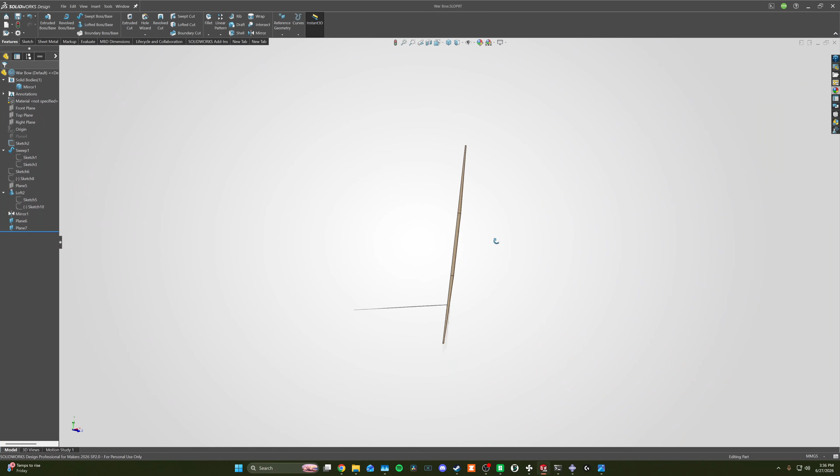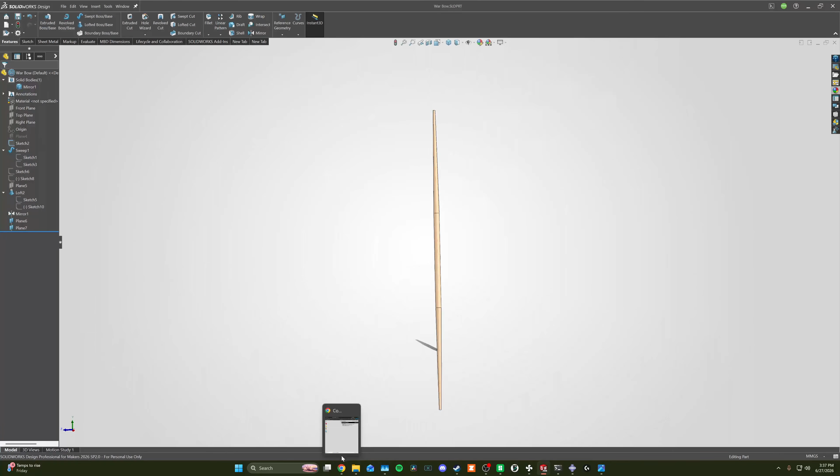I had a report on the English Warbow, which I have modeled up here in SolidWorks. We will now take this from SolidWorks to Abaqus. The way we go about that is by exporting and saving it as a step file, saving it to some area you know where it is, and hitting export.

I will show you how to do this on the school computers over the internet. This is the website for the school computers. If you go into the enhanced computer, you will have that. Send that step file to yourself and we will begin. On the school computer, you will want to have downloaded your step file, and you can now just hit start and open Abaqus.

Once Abaqus has started, you will select standard explicit model, and then import it, which you do through file, import, parts, and change the file type to step, and here it is. We'll import it just like that. Sometimes it'll come up with an error that says there's some highlighted imprecise geometry. Just ignore that for now.

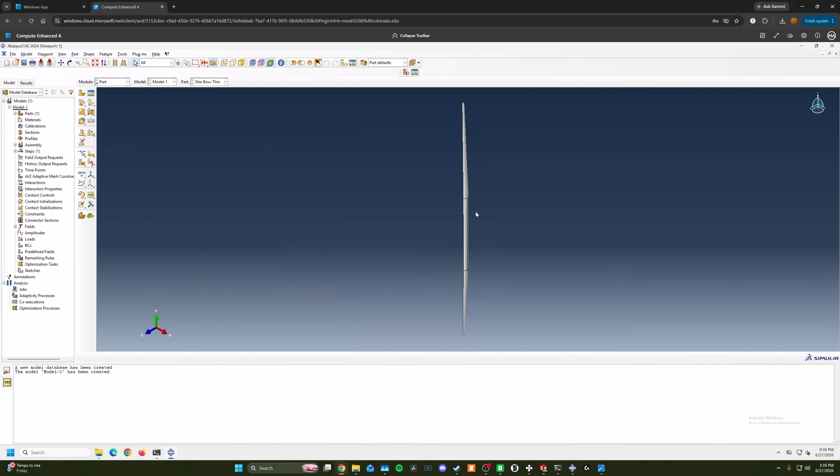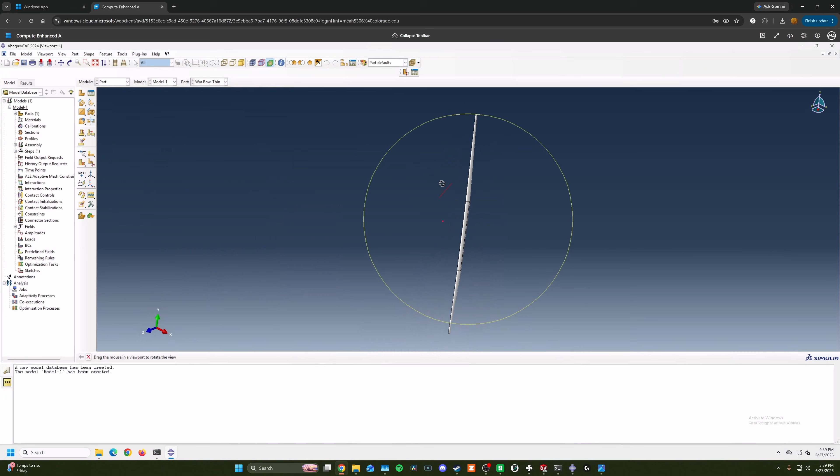We're going to be doing a static deflection model on this bow, so every bow will need its string. If you see here that you can't maneuver everything as you would in SolidWorks, what you can do is go to Tools, Options, View Manipulation, and move it to SolidWorks. Hit OK. Now we can maneuver it with the center scroll wheel. But this is good, we have our Warbow.

Next we'll need to make a string. We'll call this string. It'll be a 3D wire planar. It's going to need a large amount of space, so we're going to change that to 2000. We're going to have this here. I'm going to just model up the string as I did in my project, and I will show you that in just a second after it's done.

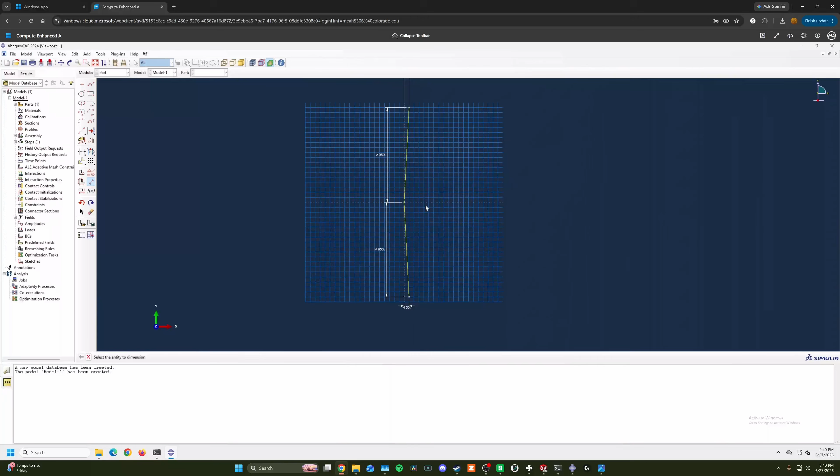Here we are. I have modeled up the string just like I did previously. It is currently 1900 millimeters long. It has a slight bow right here to make it accurate to how a real bowstring will have a slight divot in the center. After that, we can just hit done. And here we are, here we have our string.

Now we need to assign properties to it. To assign a property, you'll hit create, hit material. The name for the wood is called yew, I'm just going to type in English wood. Then we're going to need some information about its elasticity, so go under mechanical, elastic. Young's modulus is going to be 15,700. Poisson's ratio, 0.3.

Create the same thing for the string. We're just going to go under mechanical elastic here. I think the string was also 15,000, 0.3. Great, so now we have the string and the wood material.

Now we have to assign a section, so we can just hit section here. For the bow, we're going to want a solid homogeneous section because it is a 3D model. So we're going to call this Warbow section. Hit continue. For the material, we're going to select that to be the wood material we have. We don't need to assign any plane thickness because it is a 3D shape, not 2D.

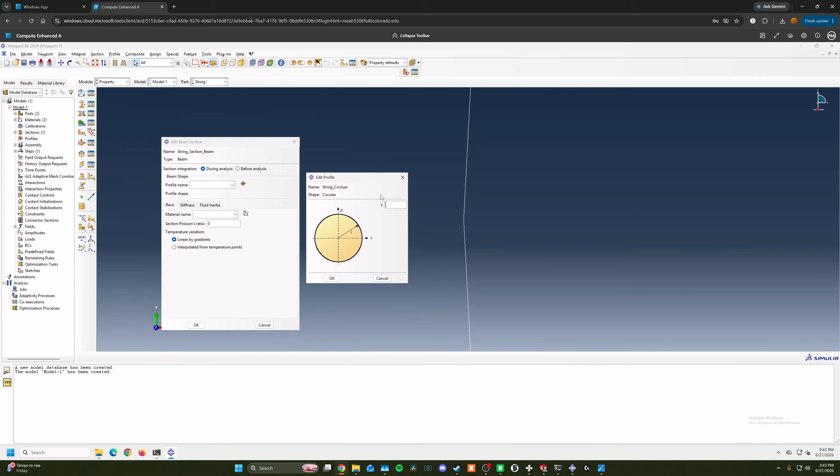The profile is going to be a circular profile because strings are circular, so this is going to be called string circular. It's going to ask us for a radius, the radius for us is 1.25 millimeters. I completely misspelled circular, but you guys understand. Material type is going to be the string, and we're going to hit OK.

Now we have to assign the sections for the materials. Since the string is here, we're going to assign it first. It'll ask us to select the whole part. We'll select that, hit done, and for the section, it's going to be the string section. It auto selected this, so this is nice. When it's confirmed, it'll be blue like you see here. For the Warbow, this is what that looks like.

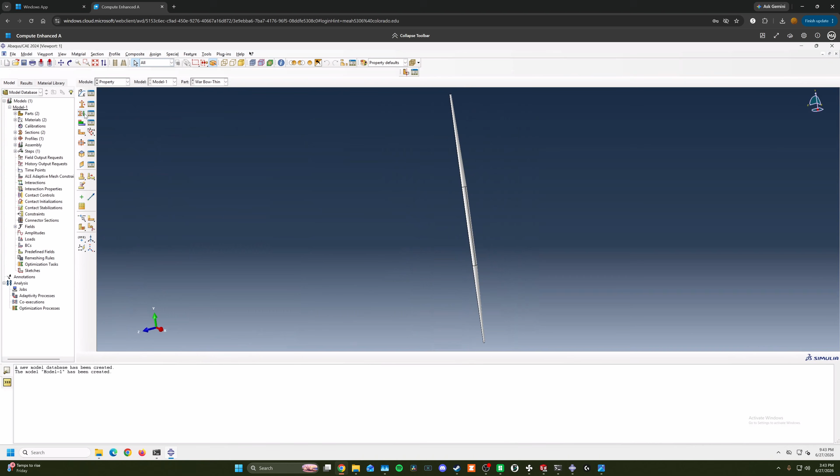We're going to also assign a section to this. Boom, Warbow section assigned. One other thing we need to do with the bow is that we need to partition it.

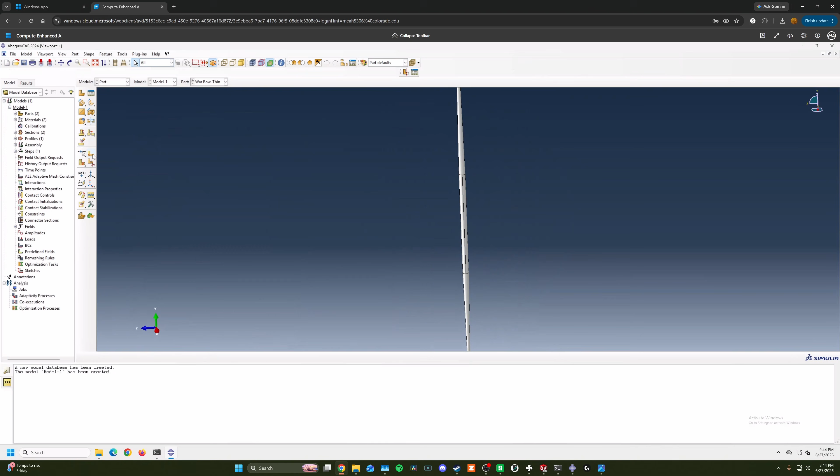We need a section in the middle that is constrained where your hand would be. I measured my hand, and roughly that is 4 inches, or 3.5 inches, which is about 90 millimeters. So we need to make a plane right in the middle of the part, which is the XZ plane here. If you hit 0, boom, you'll get your own defining plane here.

We're going to use this defining plane to create some partitions. We'll probably have to reassign some stuff, but that's okay. We'll use this defining plane to create some partitions, so we're going to do this again.

I'm going to hit 45 because I know that's where the top of the hand will be, and negative 45 for where the bottom of the hand will be. So there's that, and we have created our planes.

If you select this partition cell button, you can see that there are other options. Anything with the dark arrow, the black arrows in the corner, shows that there's another option. Here we're going to use partition cell.

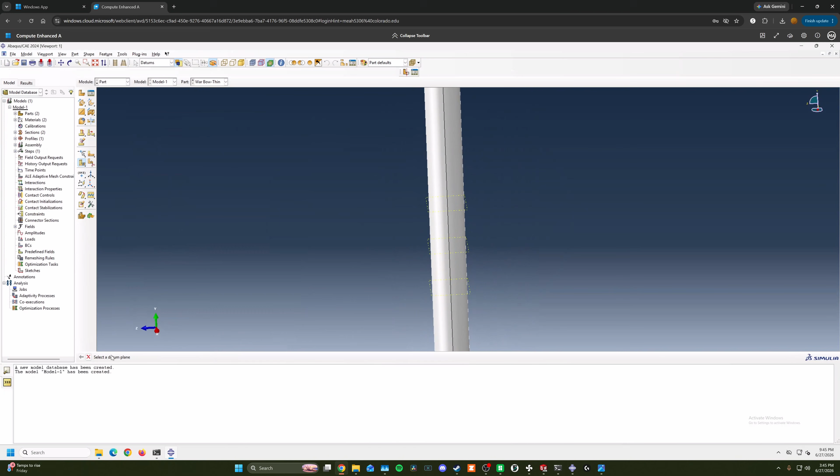We want to do partition cell so that it cuts through the whole object and doesn't just create a sketch on the outside of the model. So it's asking us to select the datum plane. We're going to select this datum plane here, create a partition, done.

We'll do that again, select this datum plane. Oh, sorry, here, because you've cut it, it's going to have different sections. So we need to just select the bottom section because that's the part we're about to cut. Hit OK, then select this datum plane, create a partition.

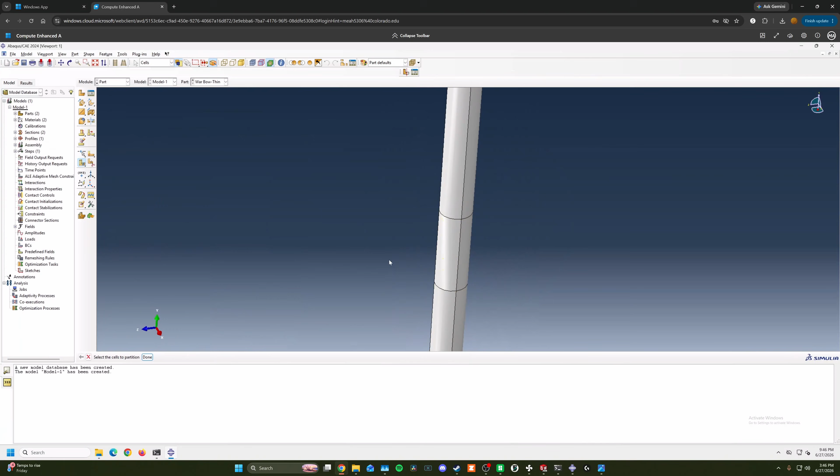If you go to View, Part Options, Datum, Show Datum Planes, and click that off, you can actually hide that. And we can see this little section here is where our hand will be. This will come in very handy in the next step.

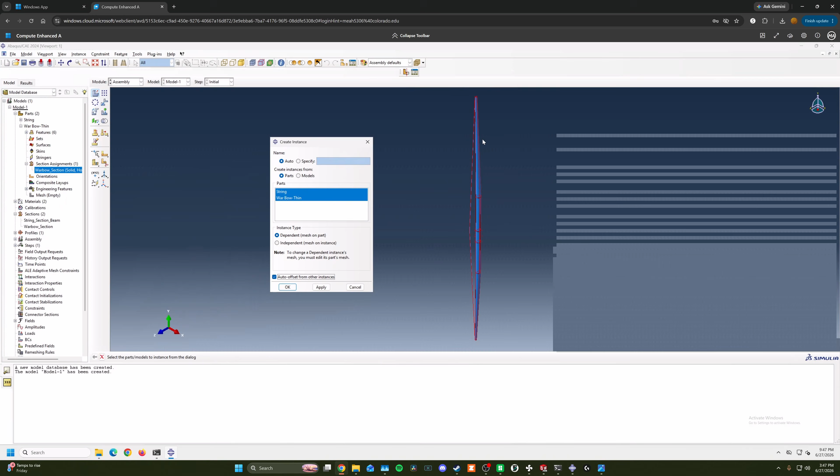In the assembly step, what we'll do is create an instance, which is this button. We'll have both of these added in. We're going to hit auto offset so that they don't interact with one another, and then we're going to hit OK.

Now I have the Warbow in the assembly, and we can now begin adding all of our loads and interactions. So let's go to step. We're just going to need to create one step for this. It's going to be a static general step, you can just hit OK.

Afterwards, we're going to go to interactions, and we're going to need to create a special interaction. Go under create constraint, and this is going to be called an MPC constraint, which is a multi-point constraint. We're going to call this the top bow. What it's going to ask is to select the control point, so we're going to select that, and then it's going to select the second region.

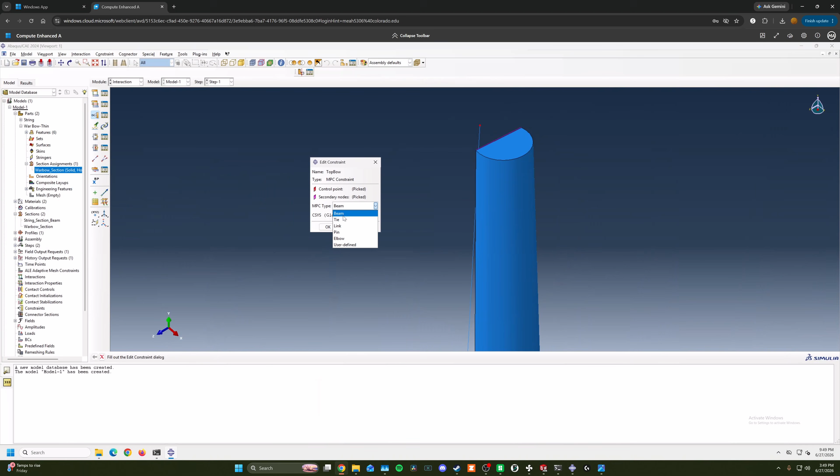We're going to select this edge, and hit done. Here a little pop-up window will come up. We don't want it to be a beam, we want it to be a tie. So we have the bow with its constraints applied just like that.

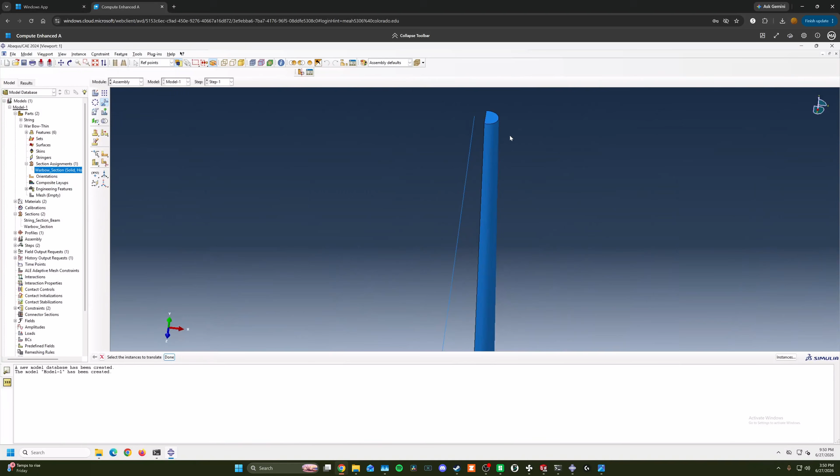What we're going to do now is actually translate the bow so that it's touching the string like it would be in real life. So the way you do that is go to assembly, go to translate, select the instances to translate, which in this case is the actual bow, and then select an axis for the start point. It's going to be the center here, and then the end point is going to be right here.

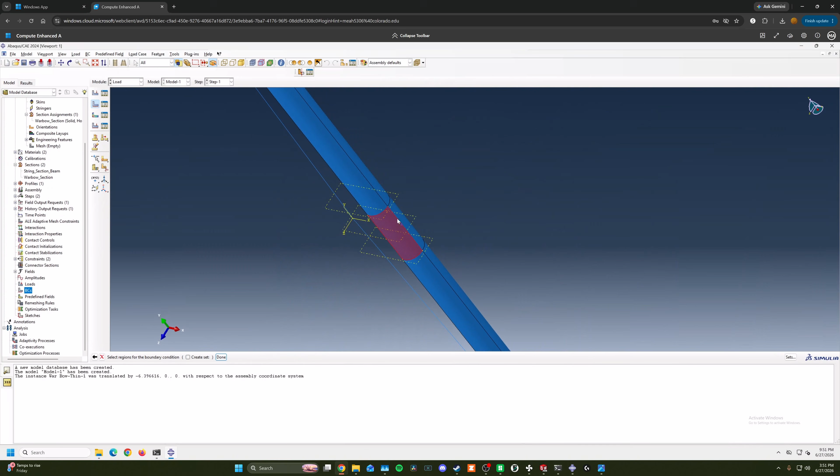So great, first things first, we're just going to be applying these loads and boundary conditions. This first boundary condition is going to be called the hand grip. It's going to be mechanical and then symmetric here. We are going to select this surface, hold shift, select this surface, hold shift and select this surface, and hit done. We don't want this area of the bow to move at all in any direction while we're pulling the string, so we're going to use encastre right here and set it all equal to 0.

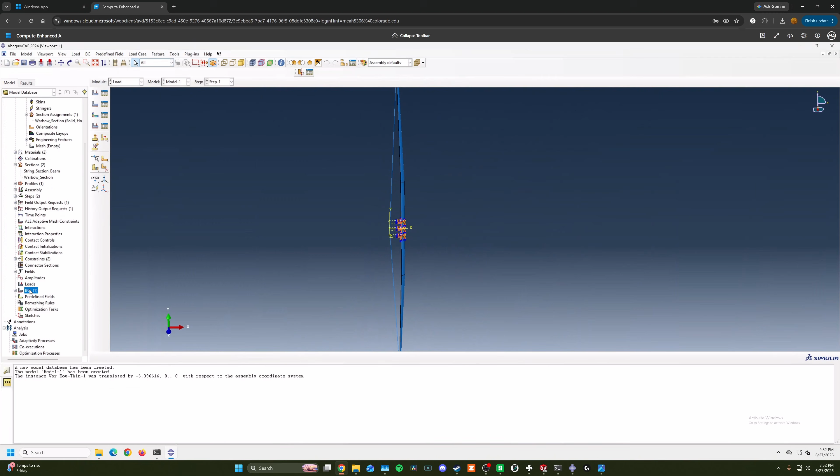The next thing we need to do is put the displacement on the actual string. Warbows are displaced roughly 500 millimeters, which is about 20 inches or so, so we need to put that displacement here.

We're going to call that a boundary condition, under displacement and rotation. The exact point we want is right here in the center on this node. The reason I put a bend in this cable is so I can get a center point right there. And we are going to hit OK.

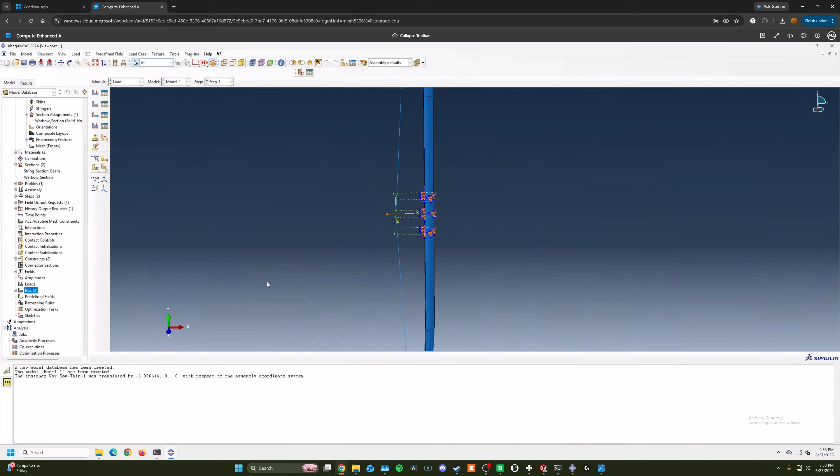Now this point is only going to be in the X direction, so I'm going to hit -500. We're going to hit OK. We are going to do our last boundary condition.

Done. So this is going to be called stop string. So we are going to constrain all of the directions that the string can't move besides U1, which is the X direction.

We just now have to mesh the parts. For the string, similarly, we're going to go to mesh element type. We're going to select the whole string, hit OK. We want to make sure it's a beam element, and we want to make sure that it's not quadratic, just B31. We're going to hit OK.

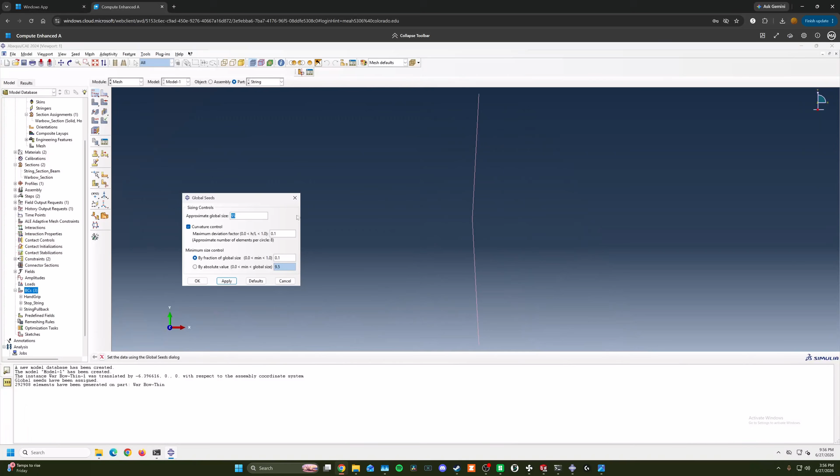We're going to hit seed, then seed part. Here we don't need as many beam elements, but we do want some, so I'm going to hit 5, and that'll put a ton right there. Then we're going to hit mesh part. Yes. If you see a blue line or blue configuration, it means that the part is properly meshed.

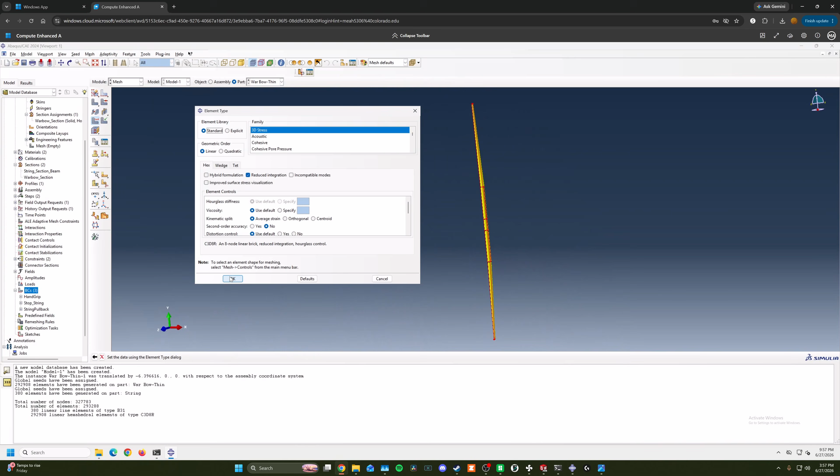All right, so here's a bow, and we're going to mesh the bow now. We need to add nodes to this. The way I do this is go to seed, and I usually check what type of element we're going to be applying. What we want to apply is a standard 3D stress hex, C3D8R.

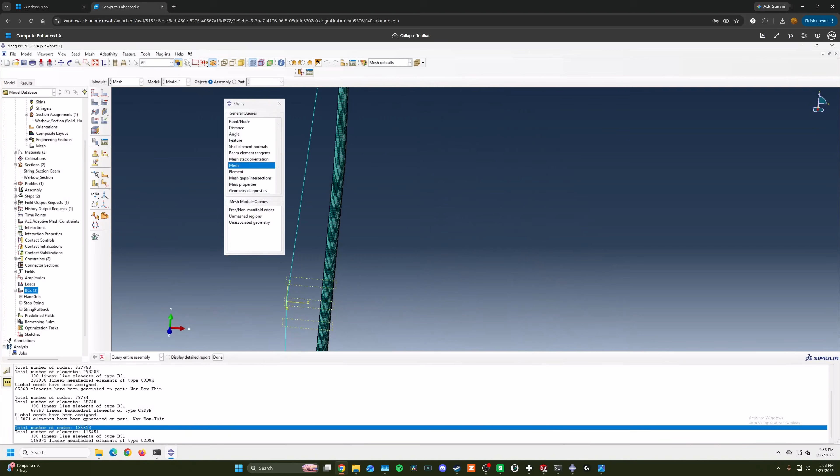We're going to go to seed and then the part, and do some number like 2. Hit apply, delete meshes, OK. Go back to mesh, mesh the part. Go back to the assembly, tools, query, mesh. Great, 115,000 elements. I remember in my model I needed to get it above 100,000 for this to work. So now everything is meshed, everything is good.

The last thing to do, I always forget this, beam section orientation: select the string, hit done, hit OK on whatever the defaults are, and hit OK here. Hit job, we're gonna call this bow pull back, hit OK. You'll see this, submit the job, and now we wait.

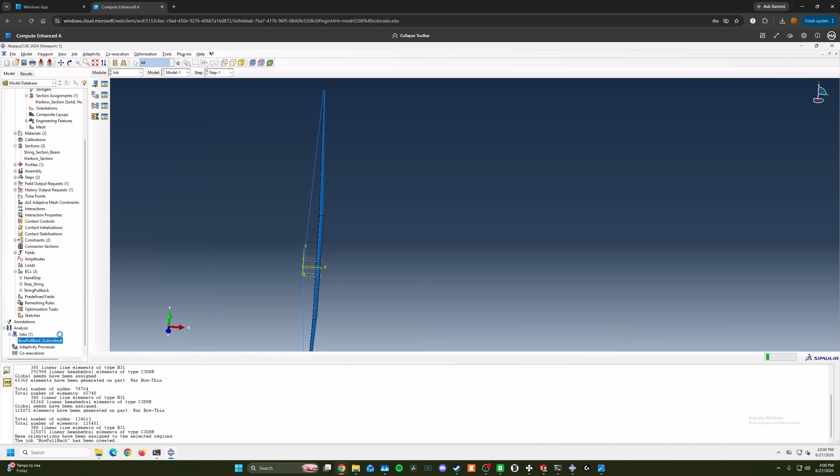Go to results, and we'll have our undeflected beam. If you hit this button, you can show the undeflected and the deflected beam, and we can see that it really deflected a lot. But there's also a deflection factor here, so it's actually not showing how much it really deflects.

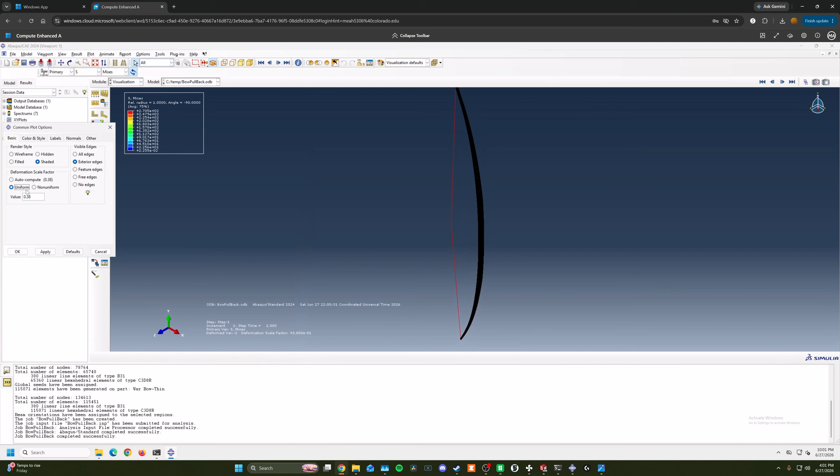The way we can change that is go to options, common, go to deformation scale factor, go to uniform, make sure this is 1. If we go and click on Z, you can see the whole Z factor, and you can see from the first point to where it deflected quite a bit, right?

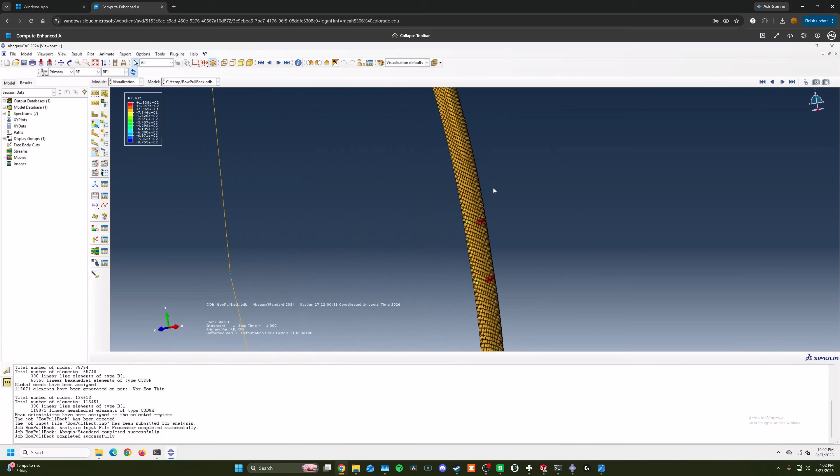As you can see, it's super dark here, and this is the area of the stress where there isn't any stresses. If we go up to here and go up to reaction forces and click RF1, we can see these are the areas where the reaction forces were happening.

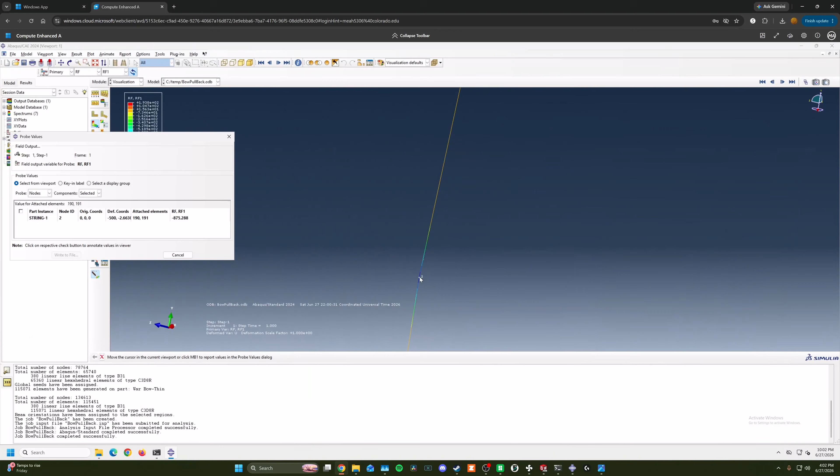So we know that, thanks to Newton's law, every force has an equal and opposite reaction. So if we probe the nodes and go to the specific point where we had put our pullback, we'll get this value for RF, and we should be seeing that value right here, but we aren't. We're actually seeing a value that's much lower.

So the way to get this is to actually go up to reports, field output. We're going to go to unique nodal, go to RF, because we need to see what the RF in the X direction is. We're going to hit RF1, hit apply. What that'll do is come down and create an Abaqus file and call it a report here.

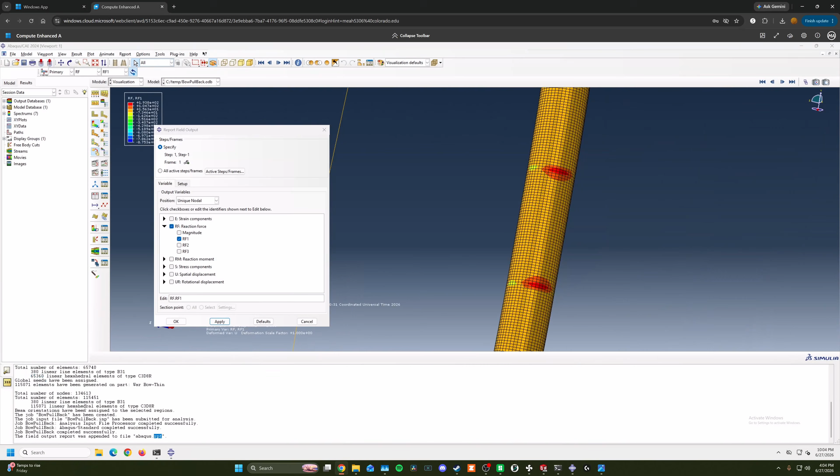Created the report here. We'll have to go to the start menu, click temp, and type in exactly this: C:\temp. That'll bring us to our temp folder, which is where a lot of the Abaqus files are going to be saved. If we change this to date modified, we'll see our Abaqus file right here.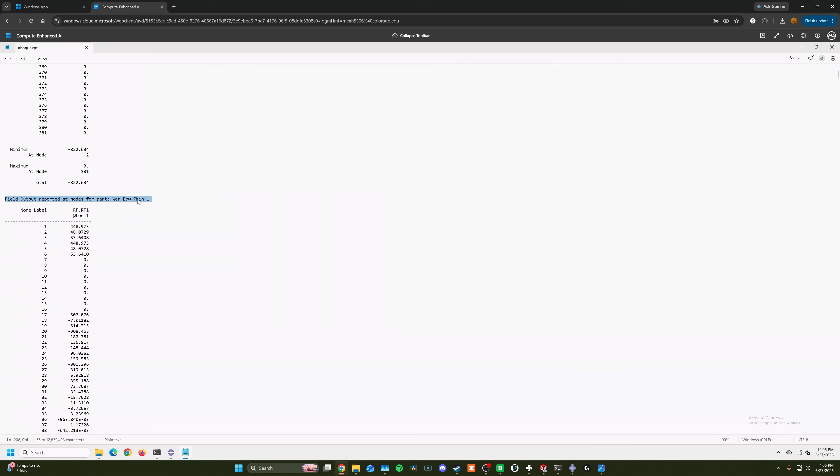We will right click, open with Notepad. This will show us the report in this whole area, just the war bow, all the way through, and we will see that it is in fact the exact same. And so, yeah, that is our reaction force, 875.